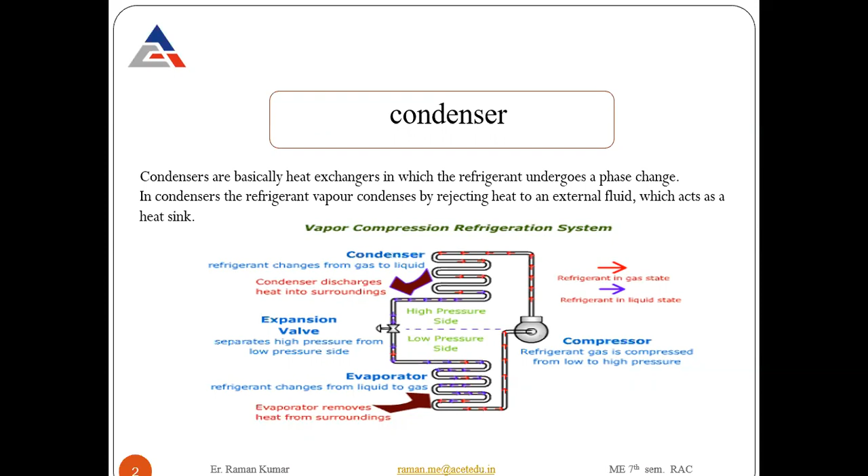So the main definition of condenser: it is basically a heat exchanger in which the refrigerant undergoes a phase change. In condenser, the refrigerant vapor condenses by rejecting heat to an external fluid which acts as a heat sink. So this is the definition of the condenser.

Next, we have different types of condenser. Number one, we have air-cooled condenser. Under air-cooled condenser, we have two types: natural convection type and forced convection type. Next, we have water-cooled condenser. Under water-cooled condenser, we have double pipe or tube-in-tube type condenser, shell and coil type condenser, shell and tube type condenser, and evaporative type condenser are also there.

So in our lab, we have this cut section model of air cooled condenser. Number two, water cooled condenser is also there. And number three, we have shell and tube type condenser also there. And evaporative type condenser model is also there in our RAC lab. So one by one, I will explain.

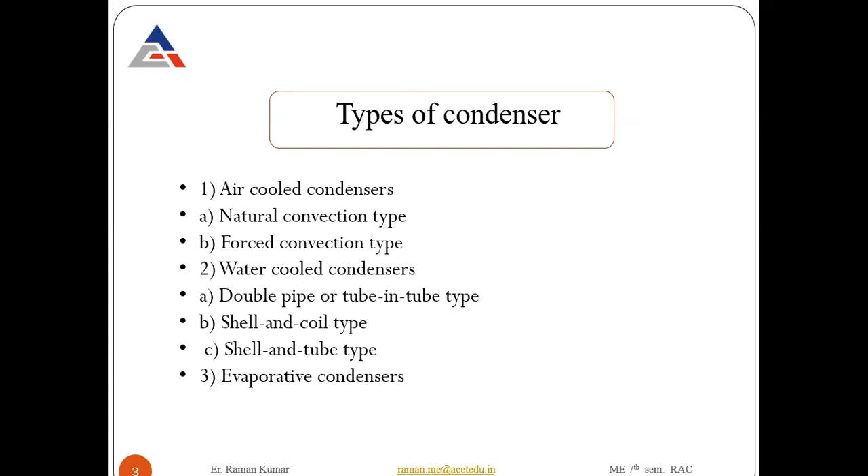First, I will explain with the help of this PPT, then I will explain with the help of the models in the RAC lab. So first of all, what is natural convection type condenser? In natural convection type, heat transfer from the condenser is by buoyancy induced natural convection and radiation. Due to small airflow and low radiation heat transfer, the combined heat transfer coefficient in this condenser is small.

The heat transfer is very slow because it depends on how much air is flowing over the pipe of the condenser. So the heat transfer coefficient is very small. As a result, a relatively large condensing surface is required to reject a given amount of heat.

So to remove more heat, a large condensing surface is required. The fins attached to the pipe are large, so that more heat is supplied to the surrounding when air is flowing on the condensing pipe.

We can take the example of this type of condenser. We will use this type of condenser in our household refrigerator, in freezers, and in our ACs, window type ACs. So you will see natural convection type condensers are also there.

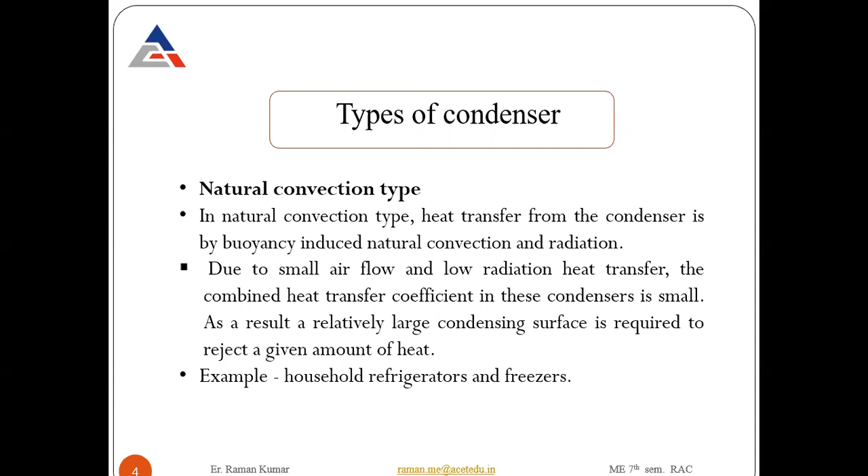Mostly in our refrigerator, you will see this type of condenser placed on the back side of the refrigerator, in which fins are also there and refrigerant is flowing through these pipes. These are the pipes through which refrigerant is flowing. So the vapor refrigerant is entering from this side.

When it enters through this side, it will give its latent heat to the fins which are attached to this pipe. So these fins are known as condenser. This arrangement is known as condenser.

So when the refrigerant, in the form of vapor, is flowing through this pipe, it will continuously give its heat to the fins by radiation or through conduction. Through conduction, it will give its heat to the fins, and the fins will give their heat to the surrounding when air is flowing on the fins.

If the area of the fin is large, a large amount of heat will flow. If the area is less, then less heat will flow to the surrounding. So as it continuously flows through this pipe, it continuously gives its heat to the fins through conduction, and the fins give their heat to the surrounding through convection.

At last, when the refrigerant reaches the end, it is completely converted into liquid refrigerant. The liquid refrigerant comes outside, and this liquid refrigerant is again supplied to the expansion valve. So this is the natural convection type.

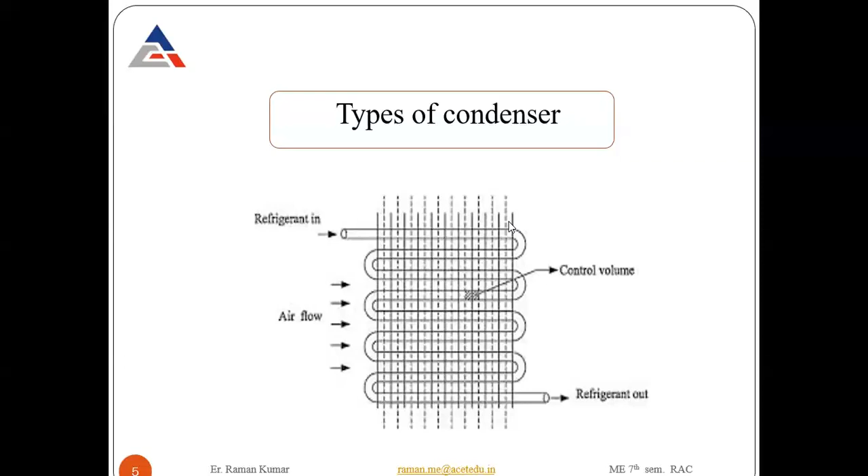So these days, this plate type of condenser is used in your refrigerator. In the new models, there is no conventional type of condenser, but this plate type of condenser is there.

Okay, so these conventional type condensers are replaced with this plate type of condenser.

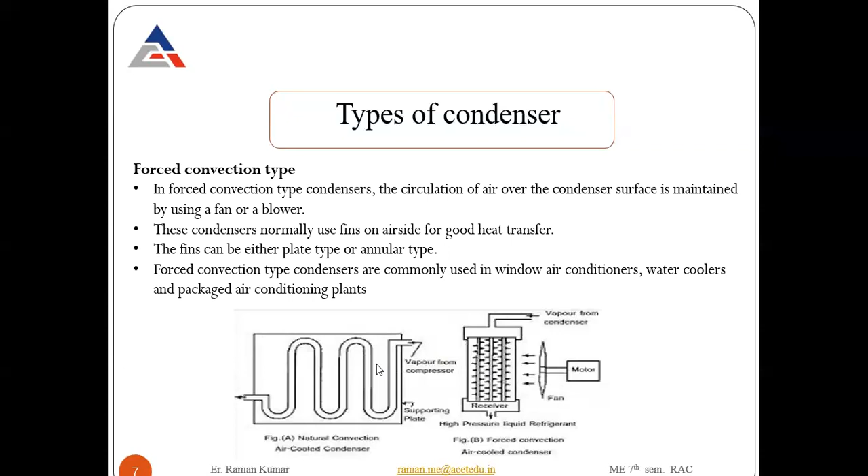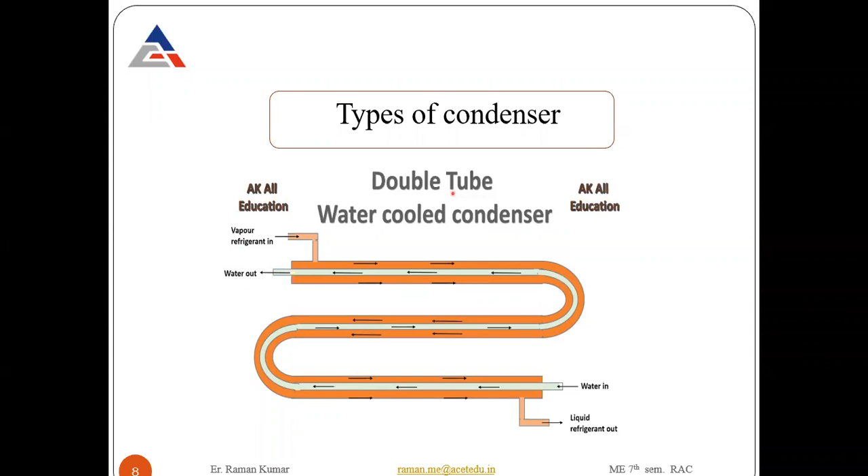So what is the difference between sensible heat and latent heat of vaporization? In sensible heat, there is no phase change, only a temperature difference - for example, temperature decreasing from 80 degrees to 60 degrees with no phase change. This type of change in temperature is known as sensible heat.

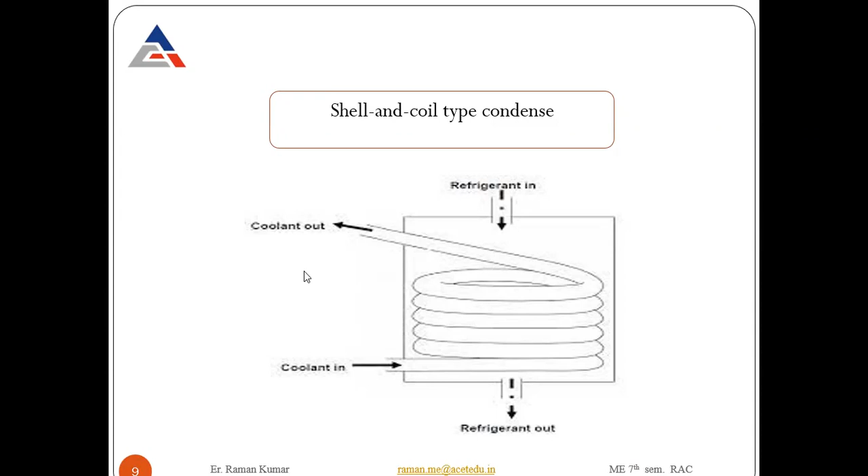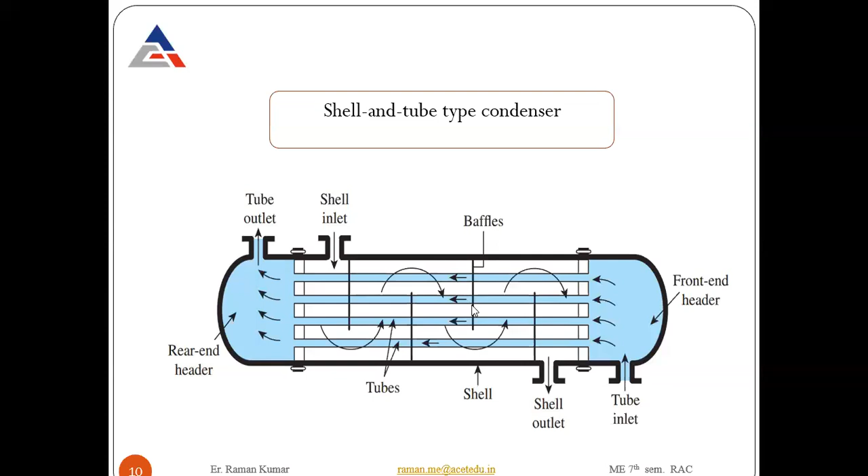Next, and the last one, we have the evaporative type of condenser. This evaporative condenser model we already have in our lab. I will show you when I go to the lab, including the cut section model of this evaporative type condenser.

In evaporative type condensers, both air and water are used to extract heat from the condensing refrigerant. The water is sprayed from the top part of the bank of tubes carrying the refrigerant, and air is induced upward.

The water flows from the upper side and is thrown onto the pipe in the form of mist, through a shower or nozzle. When it hits the pipe, it takes away heat. As water flows over the hot tube, evaporative cooling takes place, and air comes from the lower side to the upper side.

Water comes from the upper side to the lower side. So the condenser pipe is cooled with the help of water as well as air, which flows from the lower side to the upper side with the help of a fan placed on the upper side of this evaporative type condenser. It draws air from the lower side to the upper side, while water is thrown from the upper side to the lower side through nozzles.

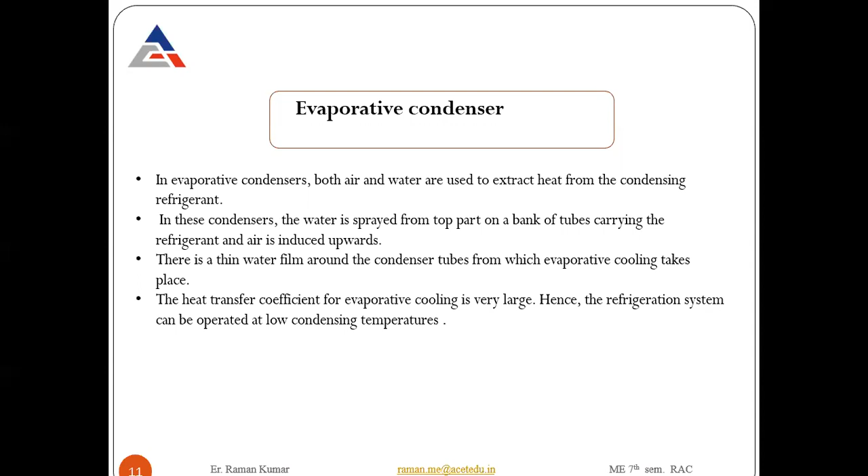The heat transfer coefficient of this type of evaporative condenser is very large compared to other types of condensers, because both water and air are used. Hence, the refrigeration system can be operated at a low condensing temperature.

With the help of a pump, water flows to this nozzle, which throws the water onto this pipe, and it will take away the heat from there.

It takes away the heat from there, and the air coming from the lower side also takes away heat from this cooling condenser coil pipe. So the heat transfer rate is very large in this case.

This type of condenser is mostly used in big industries where a large amount of heat transfer is needed. Since both water and air are used to cool down the refrigerant, this type of condenser is known as evaporative type condenser. Why is it called evaporative?

When water flows and is thrown onto the tube, the refrigerant flowing through these tubes is very hot. When the cooling water comes in contact with this tube, it gets evaporated. That's why its name is evaporative type condenser. So that is all about the condenser.

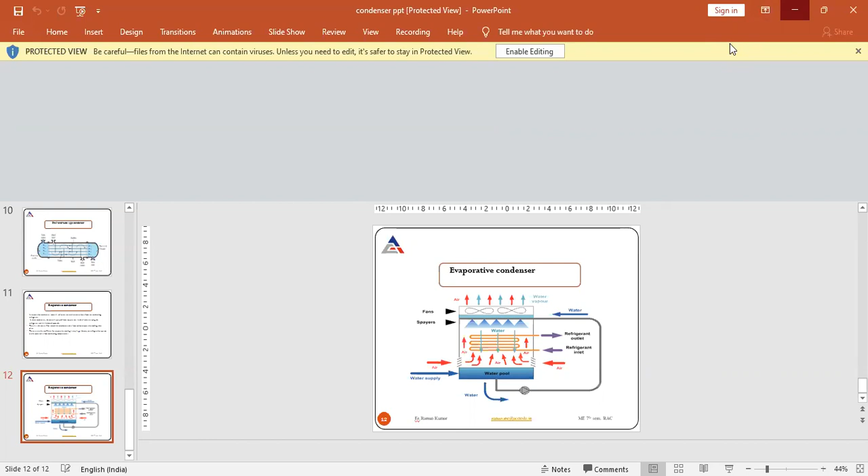We have this type, and four types of condensers are also there. Shell and tube type condensers are also there. Look at this tube type condenser.

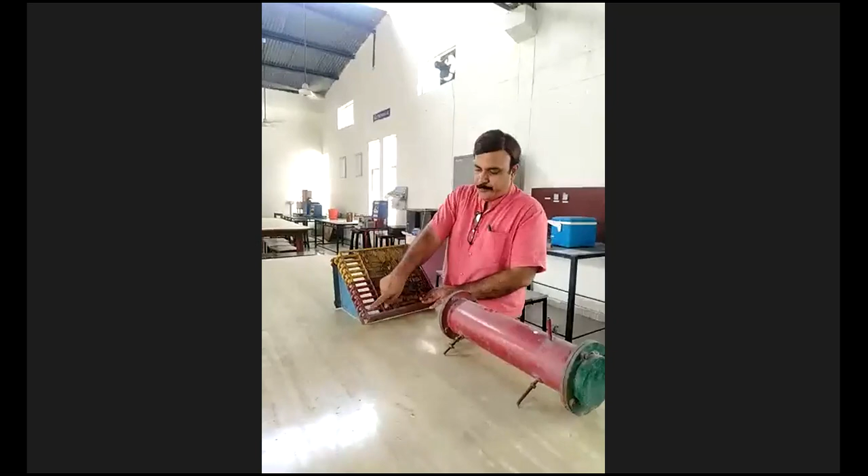Look at the vapor coming from the compressor. As it moves from the lower side to the upper side, it continuously gives its heat to these things. These are called the fins, and this red area is where the vapor refrigerant comes from the compressor.

When vapor refrigerant comes from the compressor, it flows through this tube, and these fins are attached to this tube. The tube continuously transfers its latent heat to these fins.

As it moves its latent heat to these fins, it gives its heat to the fins with the help of the conduction method. These fins, when they come in contact with the air...

As the fins continuously come in contact with the air, they continuously give their heat to the surrounding. This is how heat is transferred from the refrigerant to the surrounding of these things. This type of condenser...

In forced convection, there is a fan playing a role, helping to force more air to move over these pipes, which helps to move more heat.

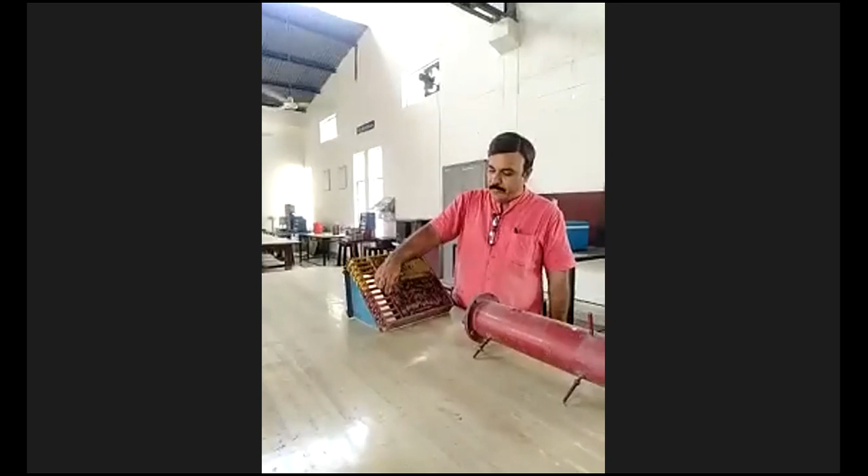The removal of heat also depends on the area of this piece. If the area of this piece is large, then more air will come into contact with it and more heat will be transferred to the surrounding.

In our window type air conditioning, more air will be supplied over this pipe, so more heat will be transferred to the surrounding. So the COP in such a case will be larger compared to the simple convection type condenser.

Now I will talk about the simple type of condenser. This is known as the simple type of condenser, which was used in old refrigerators. In older refrigerators, you would see this type of condenser.

Look here, the hot vapor is passing through these pipes. These are the pipes through which the vapor refrigerant flows. This red area is the vapor refrigerant coming from the compressor.

When vapor refrigerant comes from the compressor, it continuously gives its heat to these fins, which are attached to the pipe. When natural air flows over these things, it continuously gives heat to them by the convection method, and at the end of this pipe, it converts into liquid refrigerant.

So the vapor refrigerant continuously gives heat to these fins, and these fins continuously give heat to the surrounding by the convection method. This continues until finally the vapor refrigerant is converted into liquid refrigerant.

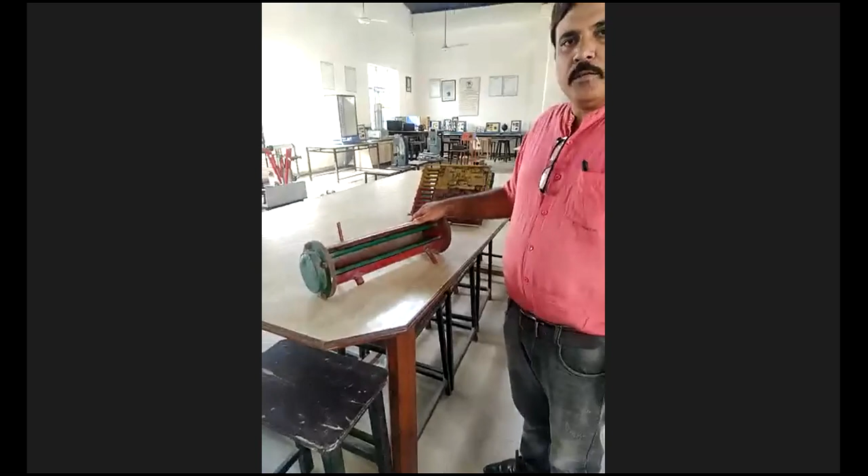Next, we have the section model of the shell and tube type condenser. Look here: the refrigerant is coming from the upper side, from the compressor, and flowing. The refrigerant in liquid form is supplied to the expansion valve through this hole at the bottom.

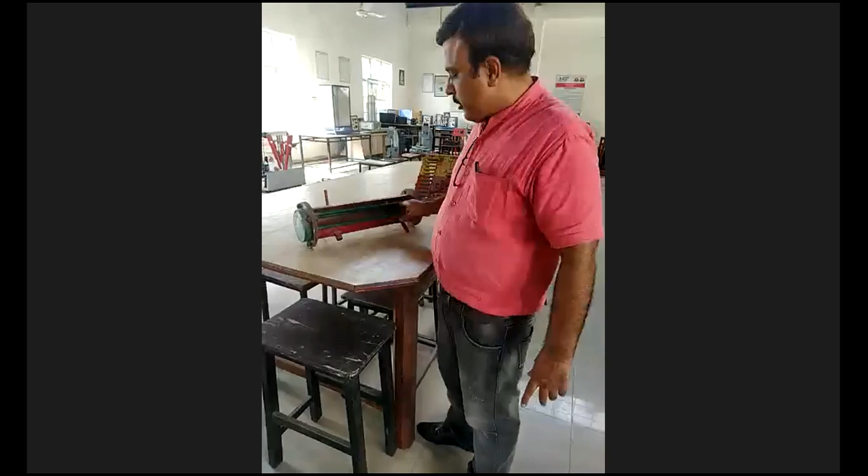The pipe is attached, and look here, water is coming from one side and going back from the other side. Through these pipes, water is continuously flowing in from one side and out the other, while the refrigerant in vapor form is coming from the compressor.

When the vapor refrigerant comes from the compressor, it continuously comes into contact with this pipe through which water is flowing. When it contacts this pipe, it continuously gives its heat to the pipe, first by conduction, then by convection method.

Then the vapor refrigerant gets converted into liquid refrigerant, which collects at the bottom of this shell, and that liquid refrigerant is again supplied to the expansion valve. This type is known as the shell and tube type condenser.

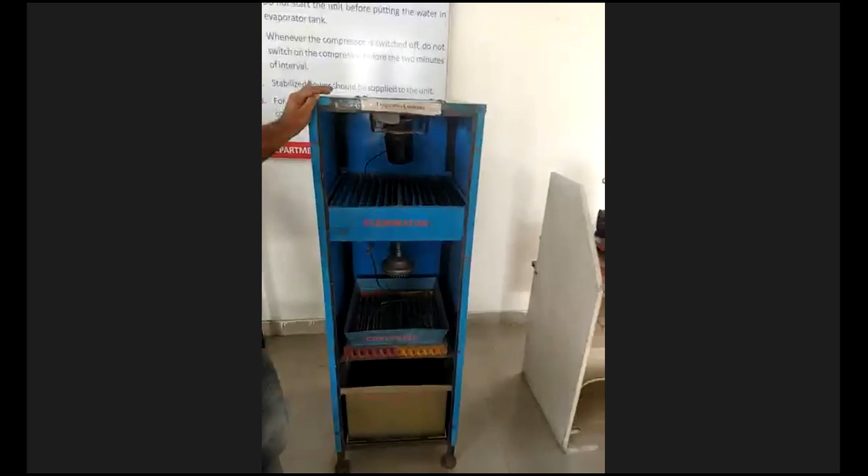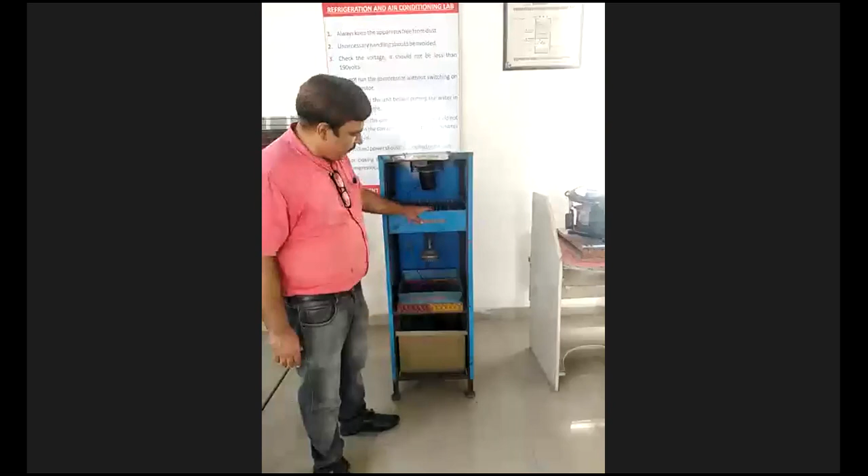Next we look here. This is the model of the evaporative type condenser. In this condenser, there is one fan used to bring air from the bottom side to the upper side, and there is one eliminator which does not allow the water to go outside with the help of the moving fan. At the lower side, a nozzle is there.

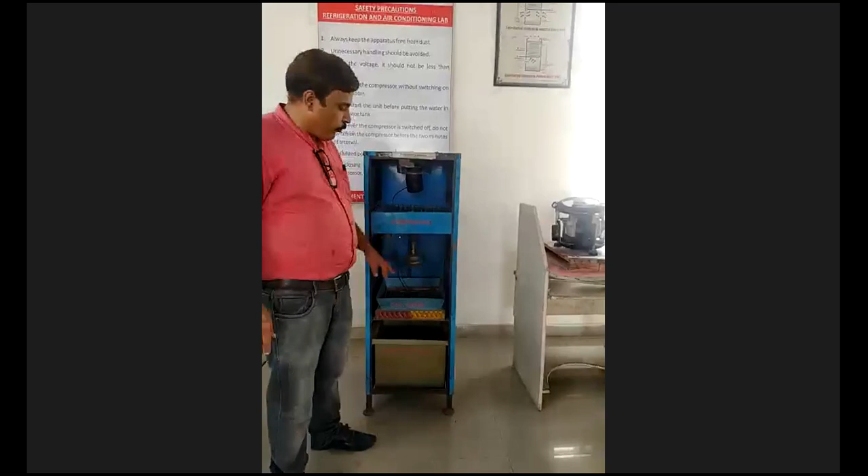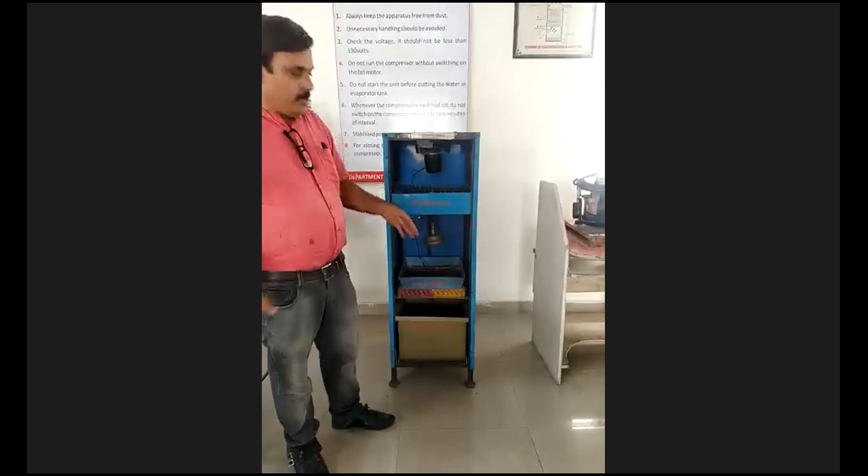In this model, the shower is replaced with a nozzle, through which water flows. This is the water tank, located at the bottom of the evaporative type condenser. Inside this tank, a water pump is also installed, which circulates the water through this nozzle.

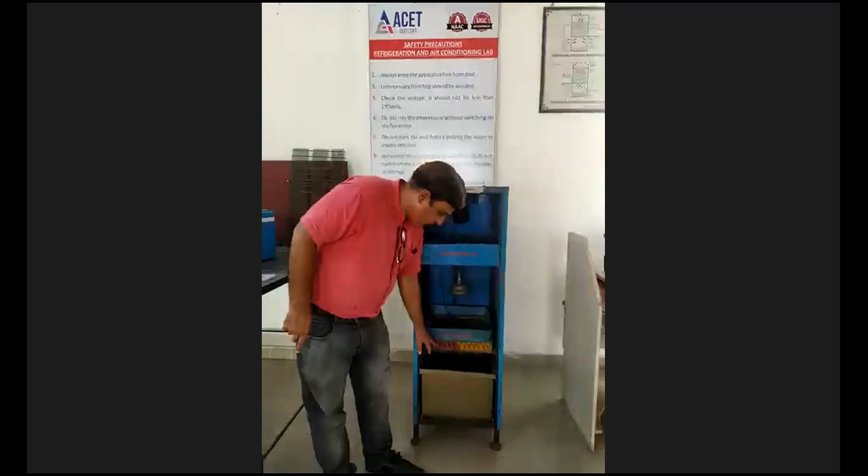When the whole vapor refrigerant goes through this condenser - look here, this is the condenser - high pressure, high temperature vapor is coming from the compressor through this pipe. Look at the red area, through which hot vapor is coming from the compressor. When it passes through this pipe, water is flowing over this pipe.

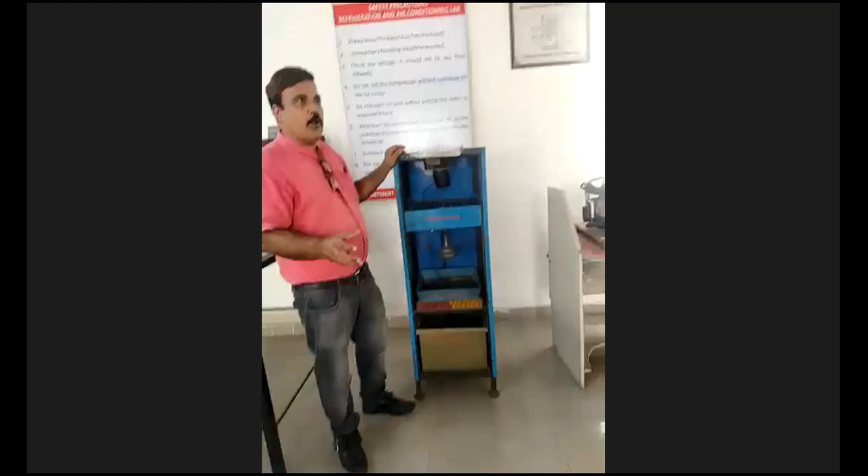When water is thrown in the form of mist, as fine droplets, it comes into contact with this pipe. It then gets evaporated. When the water evaporates, the remaining effect produces cooling, more cooling over the pipe.

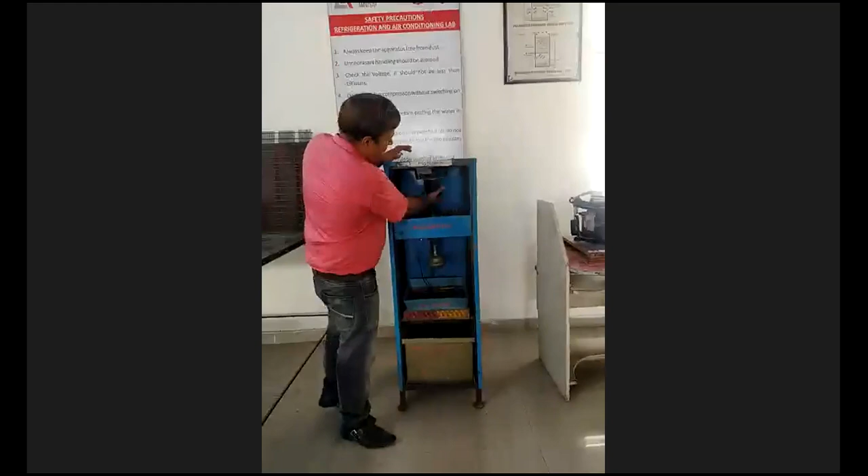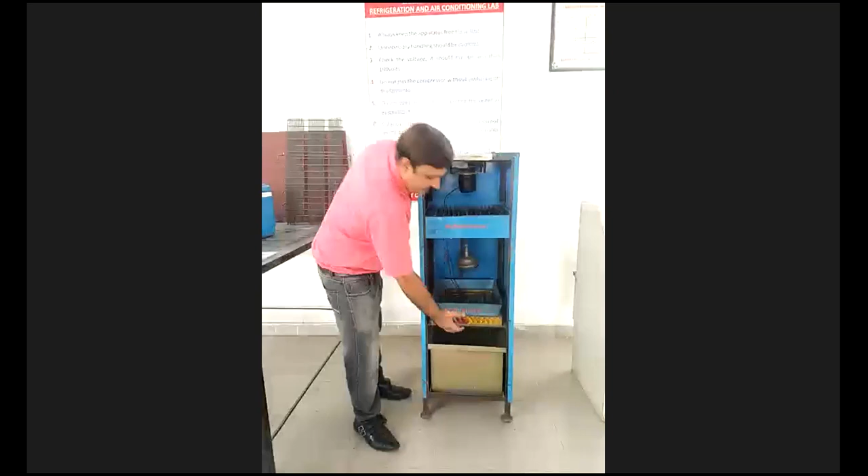When this fan is rotating and moving, it draws in more air, and that air also comes into contact with the condenser pipe. So this means the condenser pipe is cooled with the help of both water and air.

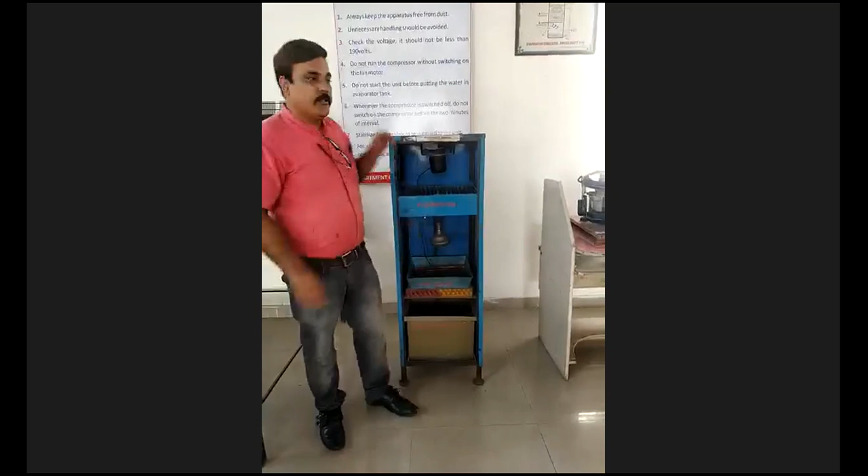And when water is thrown into the tank, it also comes into contact with the air being drawn from the lower side. The water collected inside the tank is also cooled with the help of air, removing its heat to the surrounding as air flows over the water droplets, continuously removing its heat. So the water collected at the bottom of this tank becomes cooled.

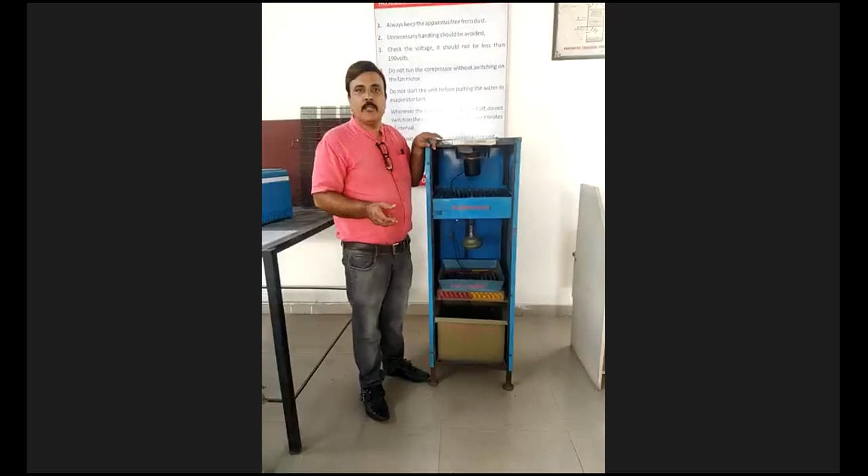That cooled water is then supplied through this nozzle over the surface of the condenser. This type of condenser is known as the evaporative type condenser, in which both air and water are used, so the COP of such a condenser is very large. This type of condenser is mostly used in power industry, chemical industry, and big industries.